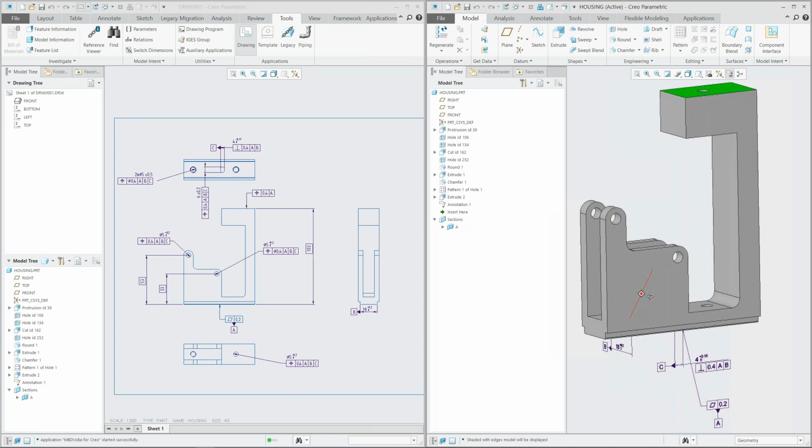We can just add the annotations manually. Like you can see here in my 3D model on the right-hand side, I have a few datums and a few annotations. But on the drawing we have much more annotations and different views as well, and transferring them manually would be a lot of work.

In this case we can do it easier using MBDVidia for PTC Creo. What we're going to do first is check which of the annotations are present in both the 3D and 2D model, and which are currently missing in our 3D model.

So here we can see, if I zoom in a bit, we have those in orange. For example the flatness, that one is already present in our 3D model. However, all the other position tolerances here are currently still missing, and they will show up in red.

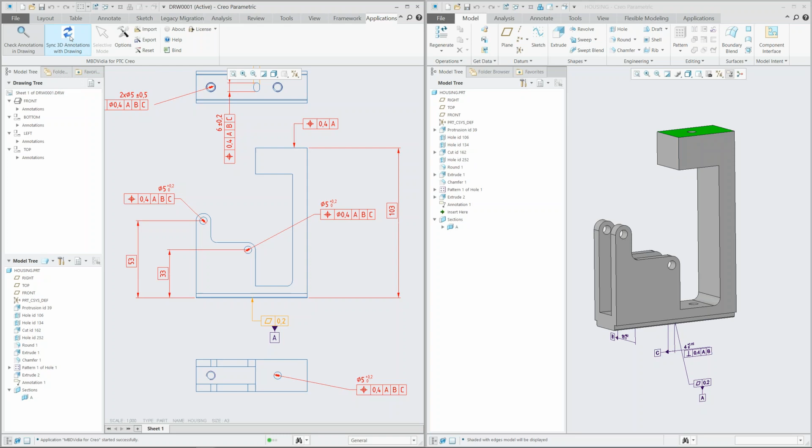Basically with the push of a button, I can synchronize my drawing and 3D model. It will do a bit of work in the background, and now you can see it adds all those missing annotations, as well as the drawing views.

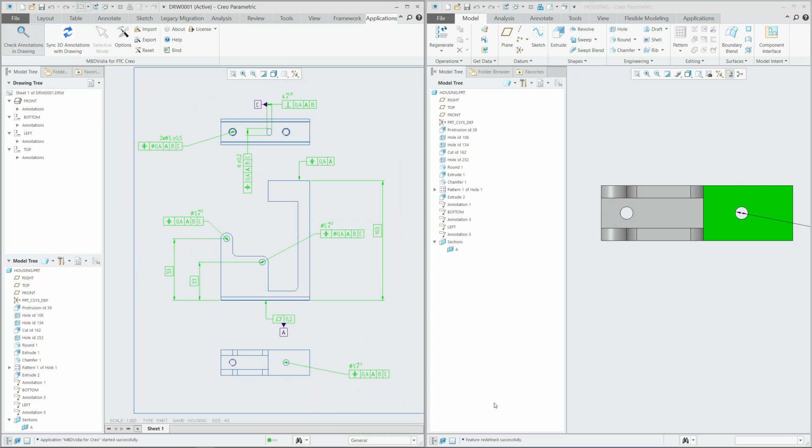Those will appear as combined states. So now all the annotations appear in green, which means they're synchronized. If I have a look at the Annotate tab, I can see the drawing views were transferred as well. So this is definitely a useful tool

if you want to reduce some work in adding 3D annotations to the model. Now that we have done that, what we want to do is export a QIF file, a quality information framework file, which we'll then use further downstream. You can see we could also use the new STEP 242 format, which can also handle 3D annotations.

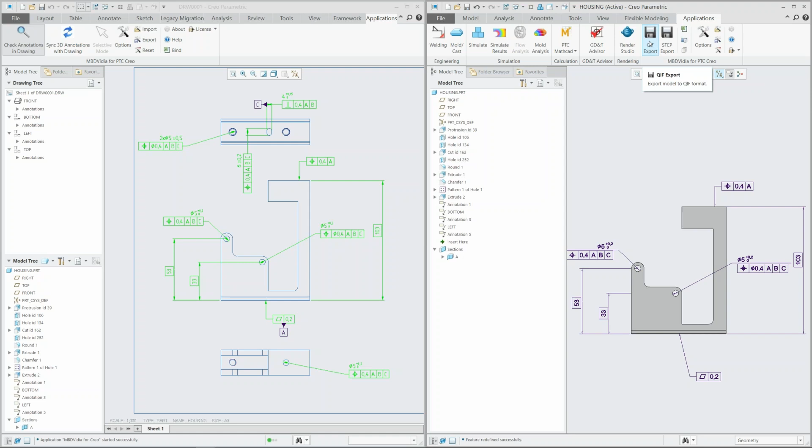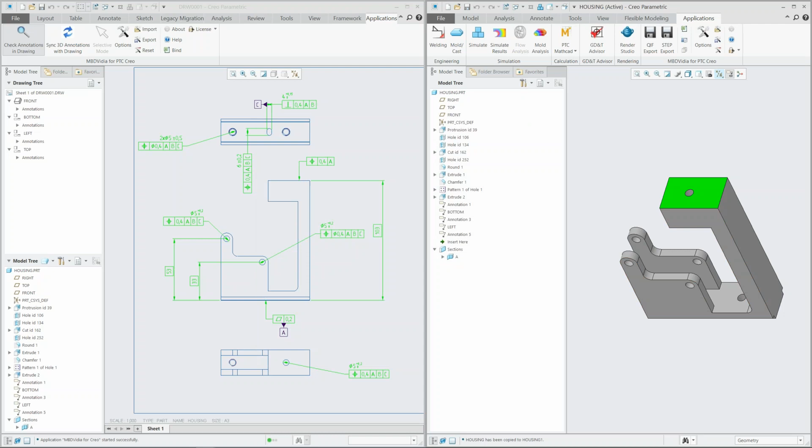But in this case we'll use QIF. So I'll just export it and save it here, and I'll also save a copy of my now fully annotated 3D Creo model. I'll just call that housing 1, and we'll move on to the next step.

For this we'll use a tool called Capvidia, and I'll just load in my authority Creo file. While that is loading, let's discuss a bit about why we want to compare those two models. Often when you export models in a different file format, a lot of the information which was in the original model gets lost or can get misinterpreted.

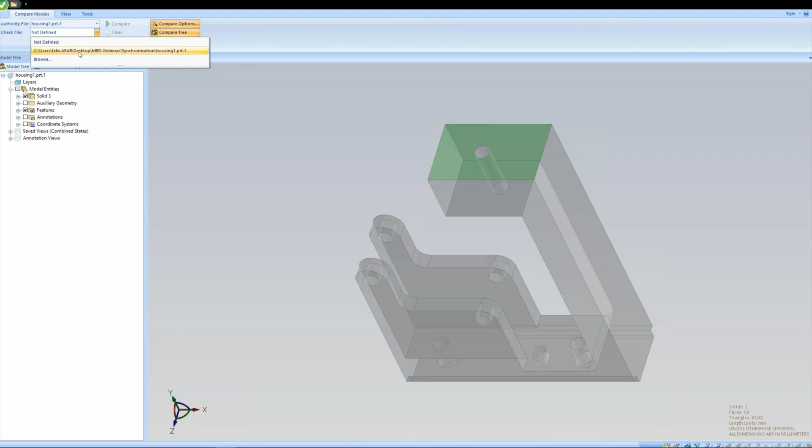For example, annotations can end up pointing at the wrong surfaces or edges, or just floating in space, or surfaces could be split into multiple ones. That's not something we want for our model. So we want to make sure that our new QIF model compares exactly to our old Creo model. So now here on the left, that's the Creo model.

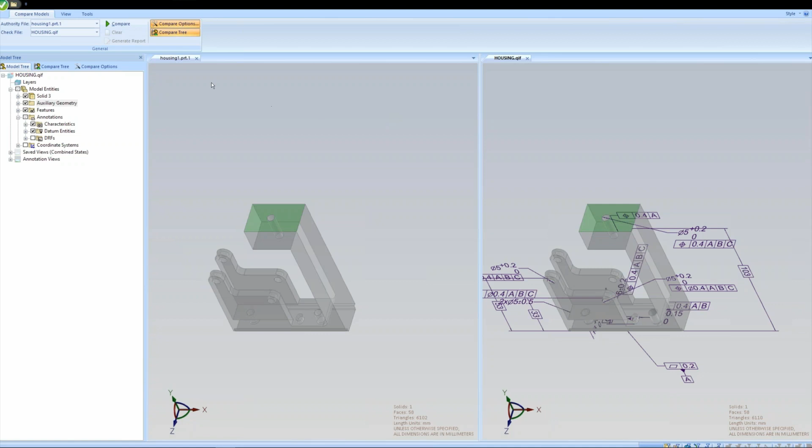On the right is the QIF. I'll just activate the annotations really quickly in both our models.

Of course, you don't have to compare Creo to a QIF file. You can compare to STEP, or you can even compare two Creo versions to each other to see if there have been any revisions done. We'll just do it with the compare button.

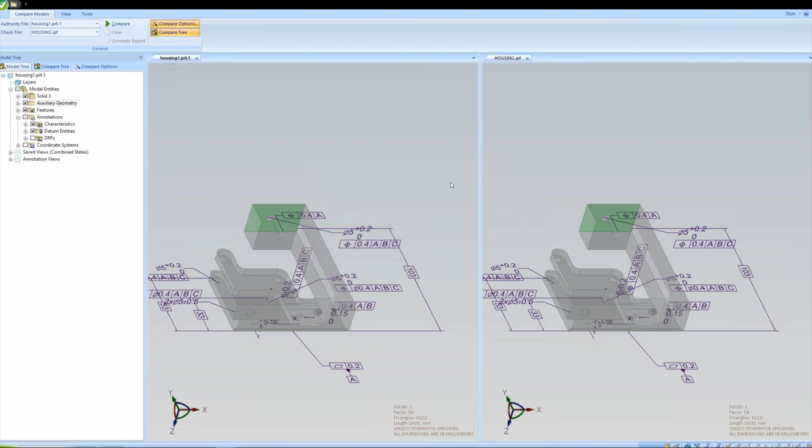We can see here our model lights up in green, which means everything is okay. We check volume, area, center of mass. Then we just do a quick geometry check to see if all the faces and edges match. And of course we also check the PMI.

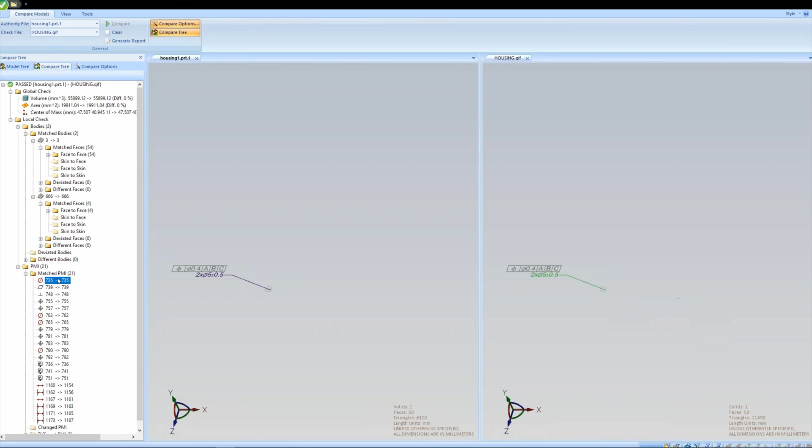This tells us that the PMI in the new QIF model is exactly the same as in the Creo model. So now we know, when we move forward, that our QIF model is a perfect replica of the old Creo model.

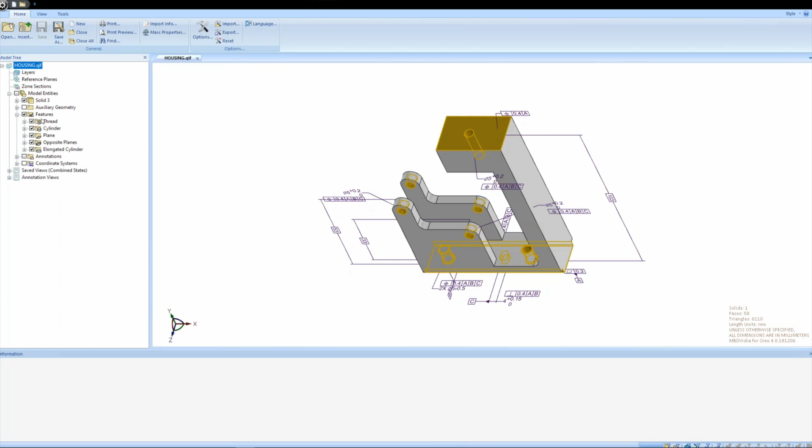Now that that's done, we can move to the next step, which we do in MBD Ready, the standalone application. Here I'll load my QIF file. You can see it here. Let's have a look at the model tree. We can see it has all the 3D geometry here in the feature tab, as well as the annotations.

So now we would have two options to move on. We could, for one, just export this QIF into measurement software, for example Calypso for coordinate measuring machines. Then the Calypso software would create a measurement plan based on the QIF file, and afterwards export the QIF again with the results attached.

In our case, we're going to do it manually. We're going to create a quick inspection plan here in MBD Ready, export that to Excel, fill in some results, and import that information back into our QIF file.

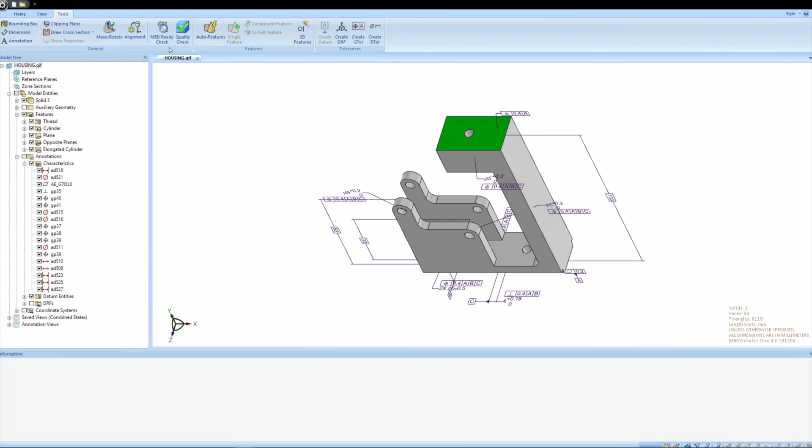If I would want to go the automated way, I first would want to do an MBD Ready check just to confirm that our 3D PMI is semantically correct, meaning it's machine readable. I click here on check, and it will tell me the moment our MBD Ready score is 100%, which means everything is correct. If there would be some problems, they would show up and we could quickly repair them in MBD Ready itself.

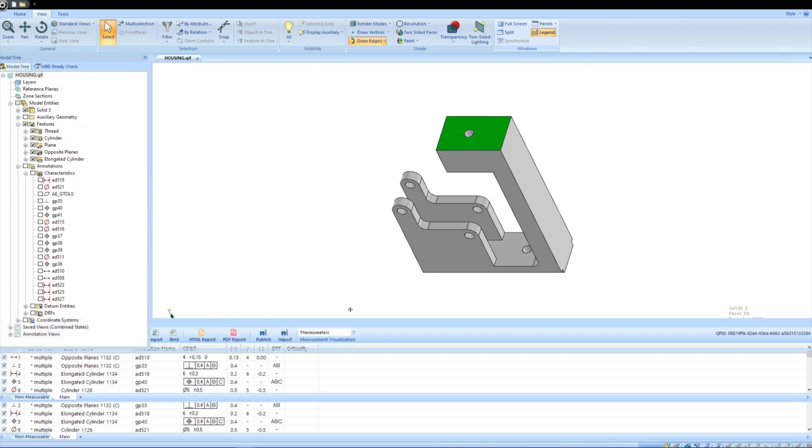All right, but let's look at the inspection plan. I'll bring up a bill of characteristics. If I enable my characteristics here, it automatically ballons and numbers all your different specifications, and creates a list down here for you.

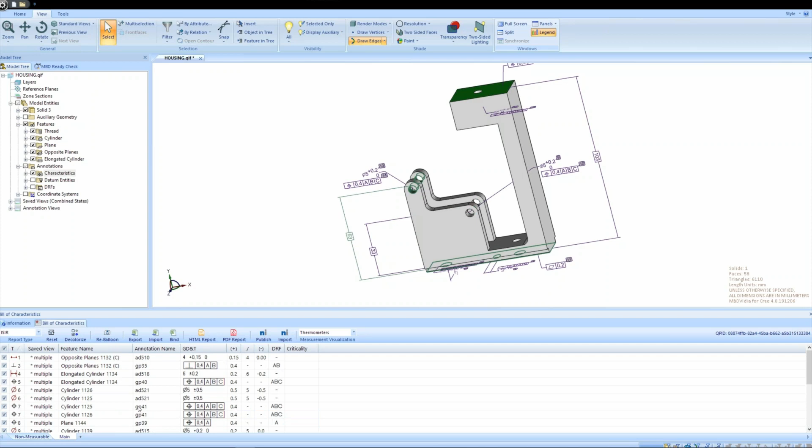Here I can check, enable and disable different specifications, which I want or do not want to include in my inspection report. I can also set the criticality of different specifications. So for example, if I think a certain feature is very important to the function of my product, I can set an extra criticality just to make sure it does get inspected properly.

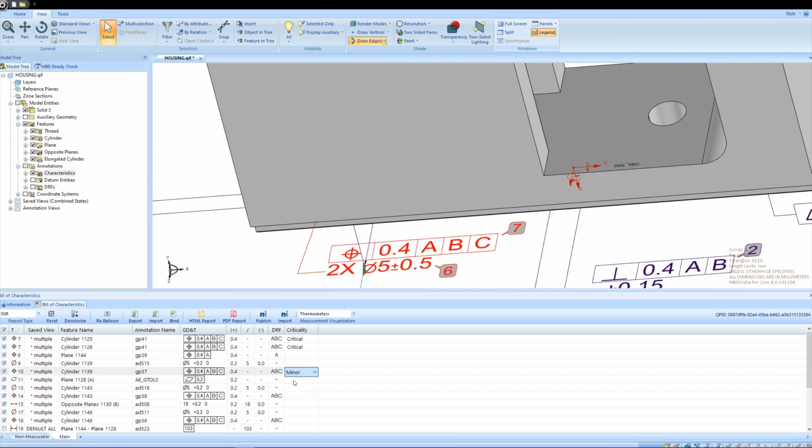In this case, I can choose between critical, major, and minor, and they will all get a different color coding.

This is a standardized template. We also have one extended, which has a lot more information, for example about the measurement device or the worst case CPK. We also got a template from the aerospace industry. And of course, you can always insert your own template here if you want some specific information present in the report. For now, I'll just go with the standardized initial sample inspection report.

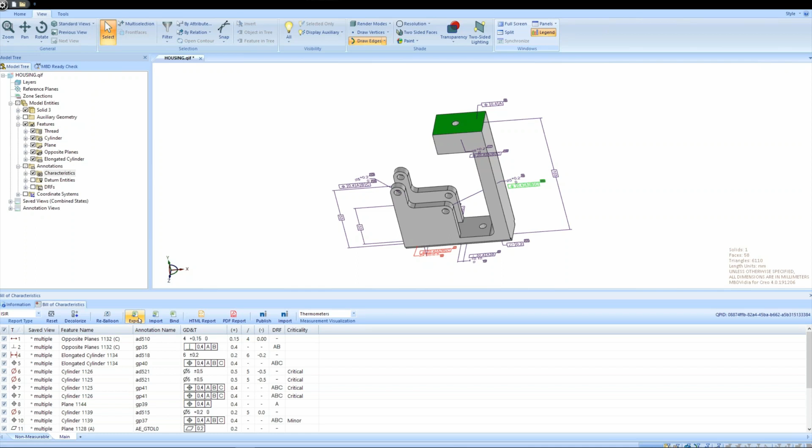Now that we are happy with all the specifications we want to examine, I'll just export this one as an Excel file. Let's see... yeah, it has been successfully exported. And then I'll bring it up here.

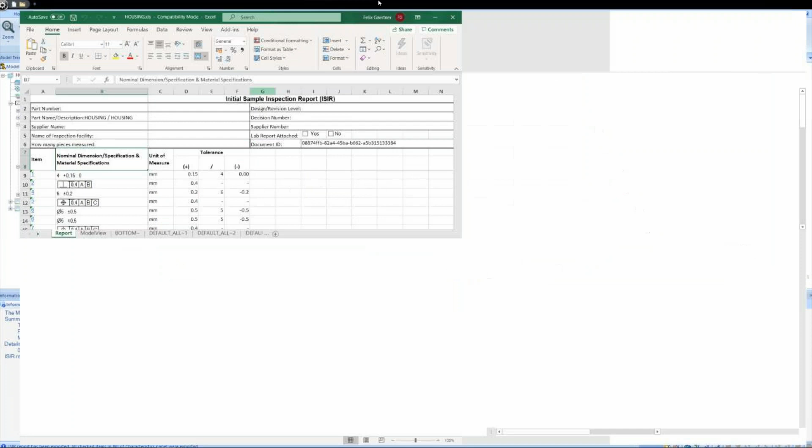All right, so this is the automatically generated report. Makes it pretty easy for you, there's no manual work involved. We have all the specifications here, the units, tolerances, and we also have those little balloon numbers here on the left. So if I click on them, it will automatically bring you to another sheet where we have the specified drawing view of that specific characteristic.

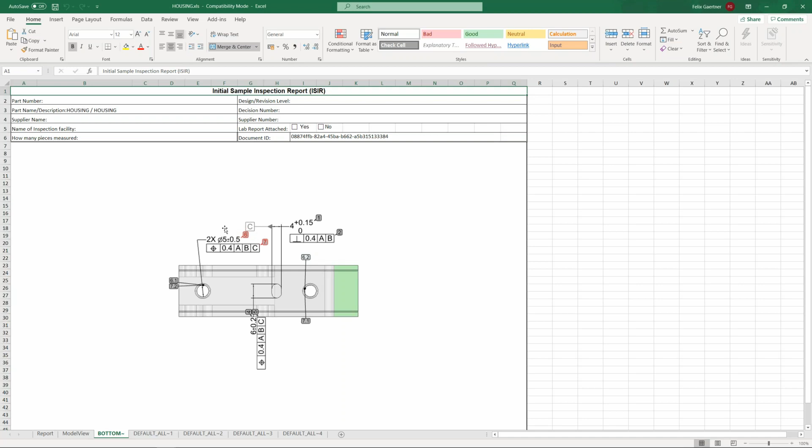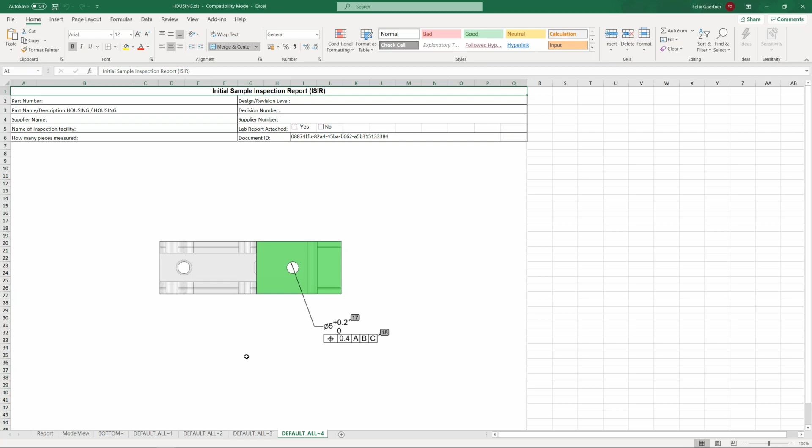And you can see this one, the tolerance I initially labeled as critical, so they will also appear in red in this Excel sheet. Even here we've got all the different views from our initial Creo model. We also got a view with all the tolerances, just to give someone an idea how the product looks, even if they don't have access to the 3D model.

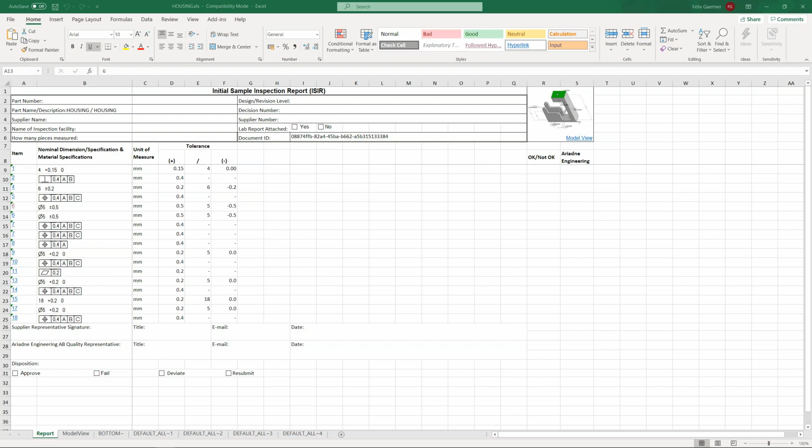All right, so now would be the time to do some measurements. I'll just copy some results in here from another Excel sheet, and name it really quickly. So this is my first batch, and within that batch we'll do 5 different measurements. All right, I'm happy with how it looks, I'll just save it.

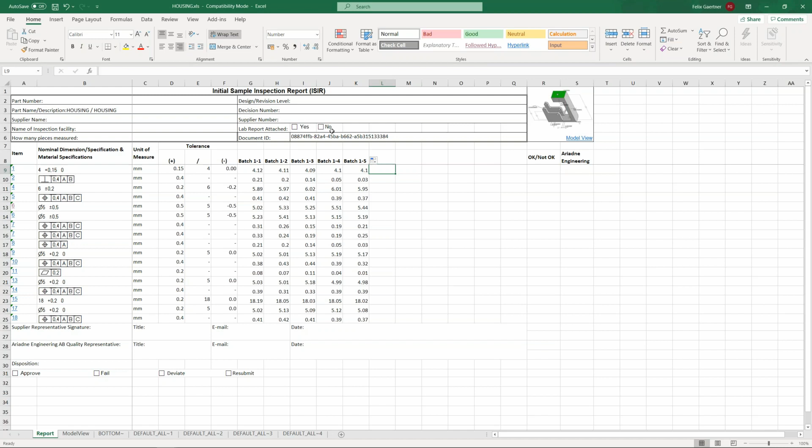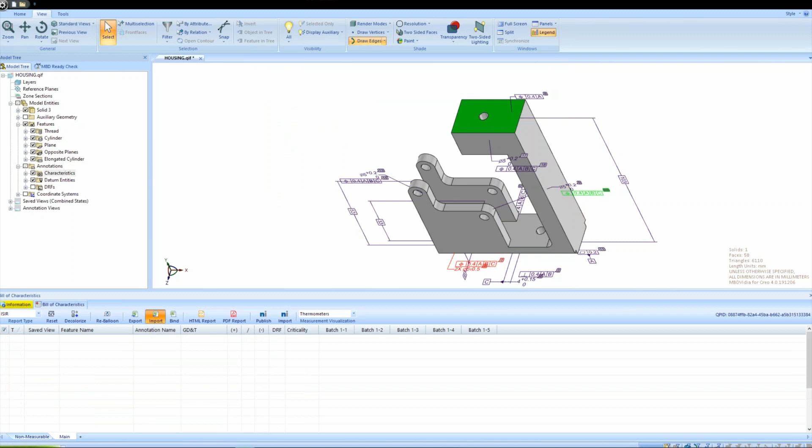And then go back to MBDVidia. All right, now I want to get my results back into the QIF file. I'll do this just by importing the filled out Excel file. And now we can see here all our results appear down in the bill of characteristics.

If I click on one of the columns, it will show me the results in a more graphical format. In this case, it's thermometers. I can also choose, for example, a moving range graph or the CPK. So this gives you a good idea about your results and how they fit in statistically.

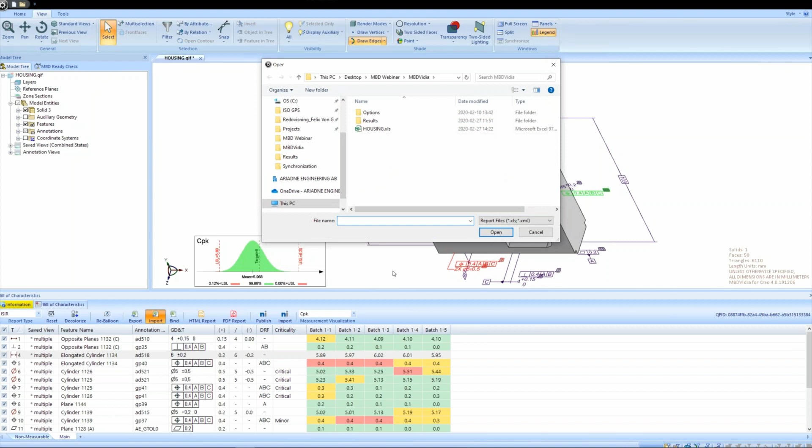All right, so if this is my first batch, and later on the next day I get another batch of results, of course I also want to feed them into the QIF file. In this case I'll just import them. I already prepared a second results batch, and they'll just get added to my table down here.

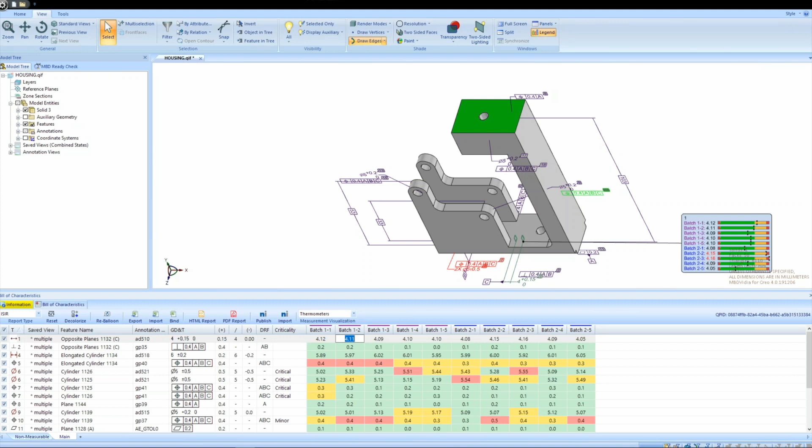It's also color coded, so purple, that's our first batch. Blue, that's our second batch. Again, if I click on one, we can see the graphics. And of course, the more results I have, the better our statistical estimation is.

And again, those results are now fully attached to the QIF file. So if I go back here on my model tree on the left-hand side into characteristics, then take one of the tolerances, you can see now that one got actual results attached to it. So if I would hand this QIF file further downstream, they will also have that information available. That could be very useful, for example, for statistical process control, or if I want to do some tolerance analysis, I can now work with real values instead of just assumptions.

So yeah, this was a quick overview of what you can do with some of the applications Capvidia provides. If you have any more questions, I'll now give it back to Miroslav, and feel free to ask anything that's on your mind.